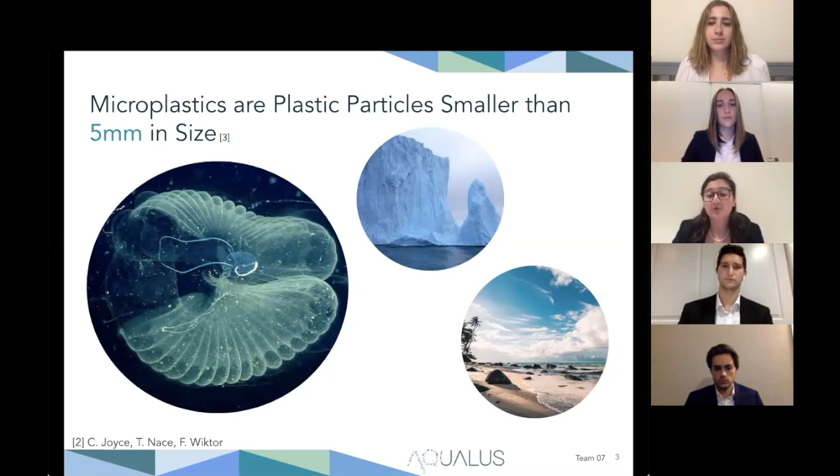Microplastic pollution poses a threat that is potentially far worse than general plastic pollution. Because these particles are so small, they fall within the optimal prey range of many microorganisms. In addition to getting eaten and bioaccumulating up the food chain, varying sizes and densities make them easily distributed across the globe. They have been found everywhere from inside icebergs in Antarctica to on the beaches of remote islands. And because of this small size and vast distribution, they are extremely hard to gather data around.

Research organizations have classified microplastics as contaminants of emerging concern. However, due to the difficulties surrounding data collection in this field, the preliminary research is limited and incomparable across laboratories. This means that the world is not yet in a place to quantify the effects of microplastic distribution on a larger scale. Without this data-driven understanding, there are no grounds to drive policy change and cleanup efforts.

While the interest in quantifying microplastic contamination is relatively new, interest from research agencies across the world means that it will be widely talked about soon. Thus, Aqualus is on the forefront of this novel topic, positioning ourselves to tackle the first steps in this process.

Team Aqualus went out and talked to experts about their current sampling techniques in order to understand what is currently lacking in data collection and what needs to change to gather data on a larger scale. We learned that overall, this data is limited in quantity, low in accuracy, and unrepeatable across labs. And this is due to the tools that they are using to gather samples. Of these tools, there are three main collection methods currently being used.

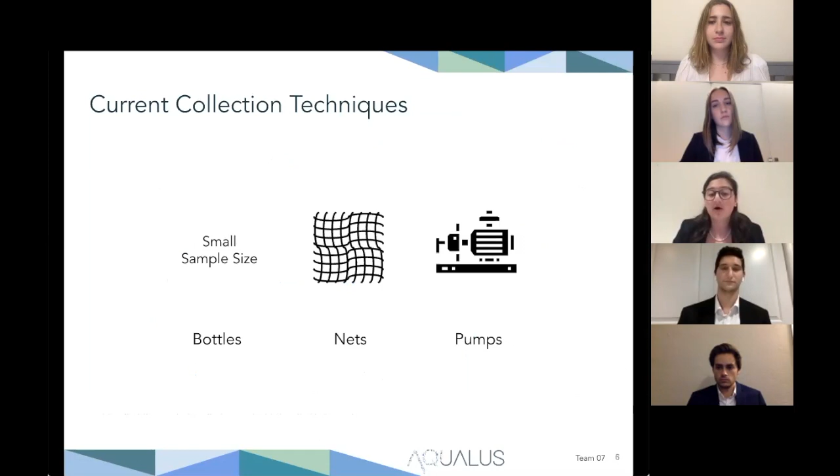The first is using bottles, a simple collection technique where the researcher dips bottles into the water to collect a sample. However, researchers are only able to collect small volumes of the water because it has to be stored on board and transported back to the lab to be filtered. Another technique is attaching a net to a pole and dragging it through the water. But with this system, the depth and volume of collection can only be estimated. Finally, a pump-based system allows researchers to pump water from deeper depths with more accuracy, but since there currently is no existing integration of pumping and filtering, only a small amount of water can be collected.

After reviewing the deficiencies in existing tools and discussing needs from stakeholders, we have determined crucial system characteristics. The system must process 500 liters of water to collect a meaningful sample based on existing data of the minimum concentration of plastic in estuaries and must do this in under 25 minutes due to the number of samples a researcher collects in a trip. For autonomy and user relief, the system must require no more than 2 minutes of hands-on attention per sample in order to reduce the strain on the researcher.

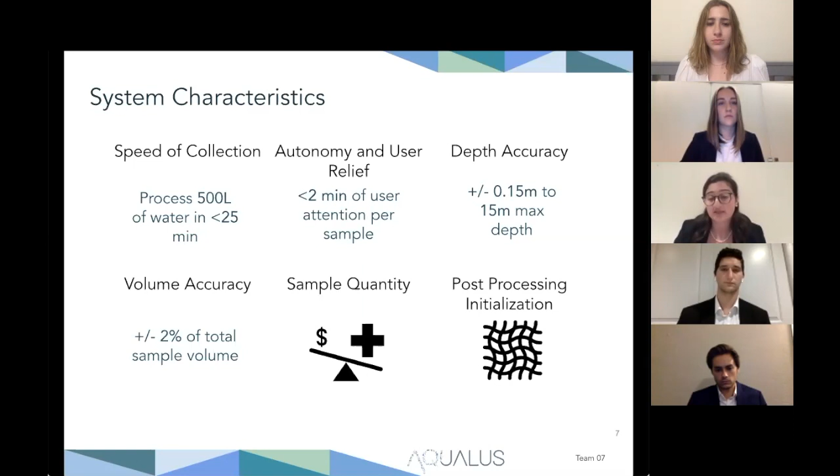To provide value, a system must sample at any depth up to 15 meters, a maximum depth of most rivers and estuaries in this region, and do this within an error of plus or minus 0.15 meters in order to acquire distinguishable data. To get usable data on concentration, a volume accuracy of plus or minus 2% of the total sample volume is necessary. And to provide a sufficient quantity of samples, researchers should be able to take at least 12 samples per 6-hour sampling trip. Finally, it is crucial to the researchers that microplastics are filtered from the water in the field, and plastics of down to at least 50 microns with a reach goal of 10 microns must be collected.

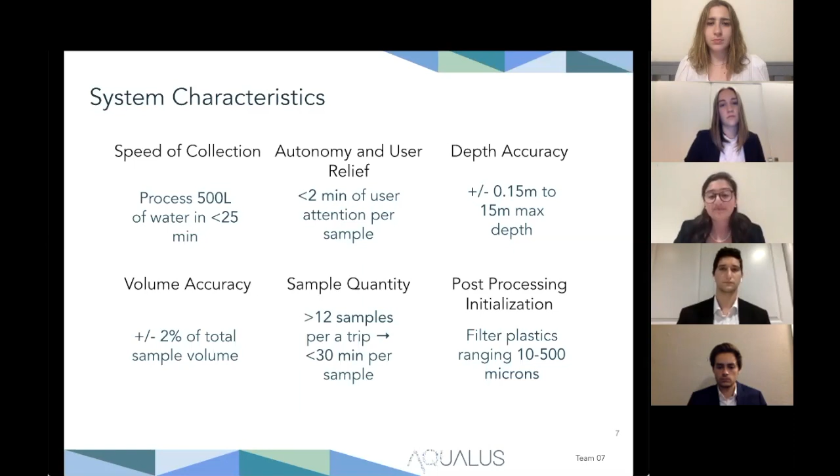To give you an idea of what value these characteristics bring to this research, we are showing you an example of what collected data looks like with the current tools. This graph, representing data from recent literature that used net-based collection, shows the concentration profile along the water column of samples taken from a river. Due to the varying sizes and densities of microplastics, it is helpful to split the data into two categories: particles denser than water and particles less dense than water, to better show the relationship between concentration and depth.

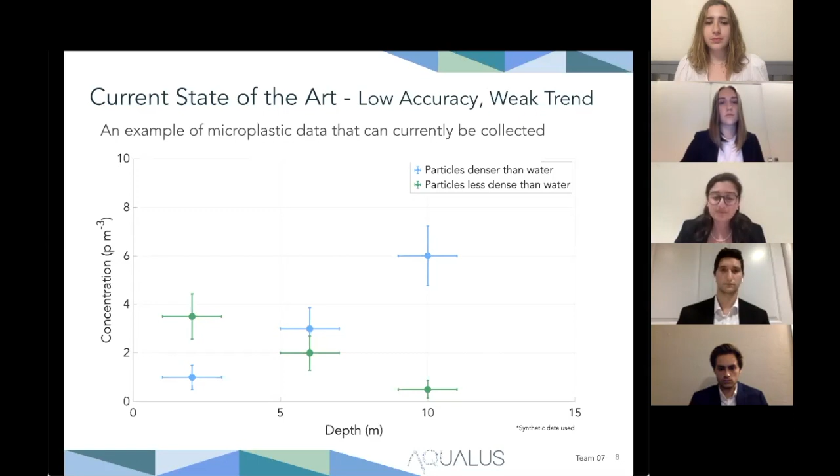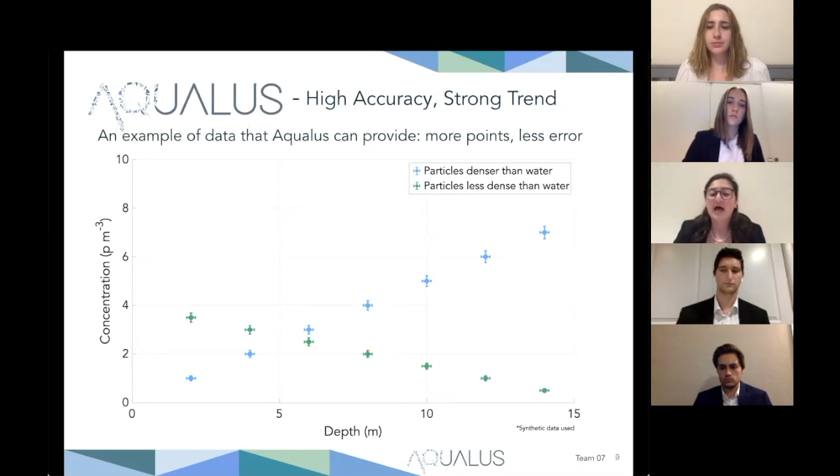However, since these samples are taken far apart and have low accuracy on both depth and concentration, you can only see a general trend and not much more. Here, we show the quantity and accuracy of data that our system should provide researchers. The relationship between concentration and depth is much more detailed and meaningful due to a larger number of data points, as well as much higher accuracies, a crucial feature in actually understanding the distribution of these plastics. This high volume of accurate data will allow for future cleanup efforts and policy change that are not currently achievable.

So we've designed Aqualus to achieve these crucial characteristics. Aqualus can be arranged in various configurations, designed to be operable on nearly any standard research vessel. It contains both autonomous and manual systems to reduce strain on the researcher, but still allow for intervention and control by the expert. Overall, Aqualus collects samples at varying depths and delivers filtered microplastics for later post-processing in the lab.

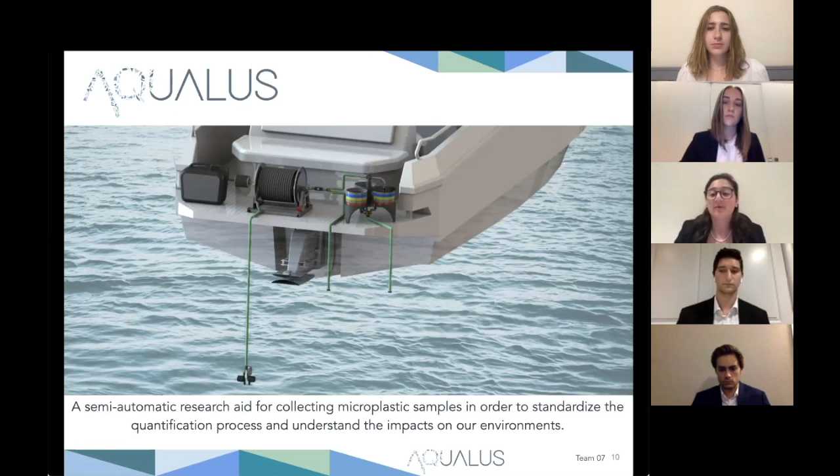Aqualus contains 5 main subsystems. These include submersible sensors and a pump that collect sample depth and volume data from the water source, and a depth control system consisting of a motorized hose reel that moves the hose to the desired sampling depth. The water flows through the hose to the fluid direction system that directs the water into the appropriate sampling stack.

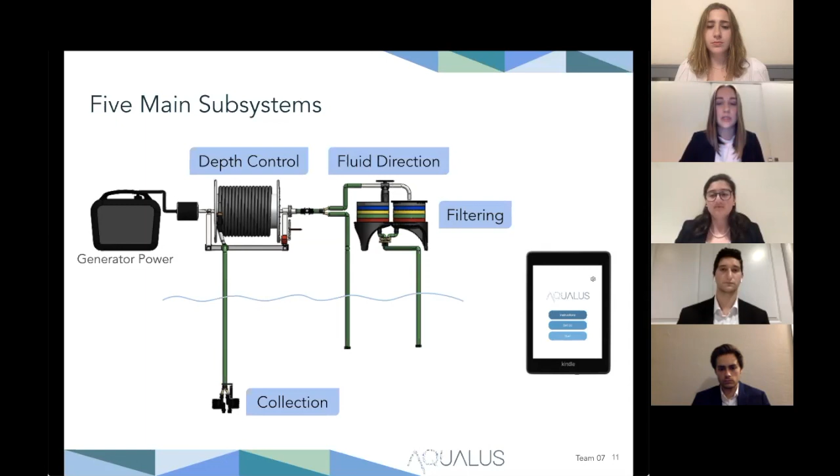Each of these stacks houses filters which filter the plastics between 5 sizes as the water sample flows through them. The water is then discarded back to the water source, capturing only the microplastics to be delivered to the researcher. The user interacts wirelessly with the system through an Android app.

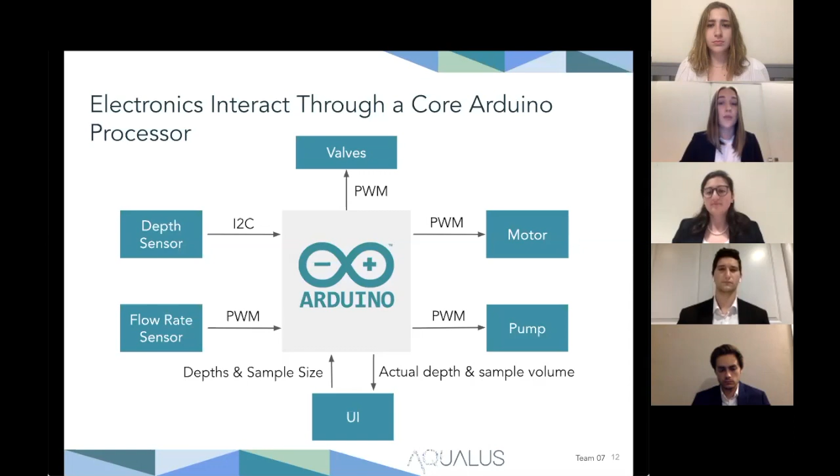Behind this mechanical system lies a communication architecture in which the sensors, pumps, and electronic components interact through a core Arduino processor. This means we take the raw data from the depth and flow rate sensor and use it to inform the commands to the pumps, motors, and valves. This Arduino also wirelessly communicates with the user interface, taking intended sampling parameters from the researcher and communicating back actual collected data.

Subsystem 1 houses submersible pumps that bring water on board through a hose, and an above-water flow rate sensor that is used to control the flow rate of the sampled water. By using a pump, we can rapidly collect a large sample of water from a wide range of depths and easily control and measure the flow of water with a flow rate sensor and control feedback.

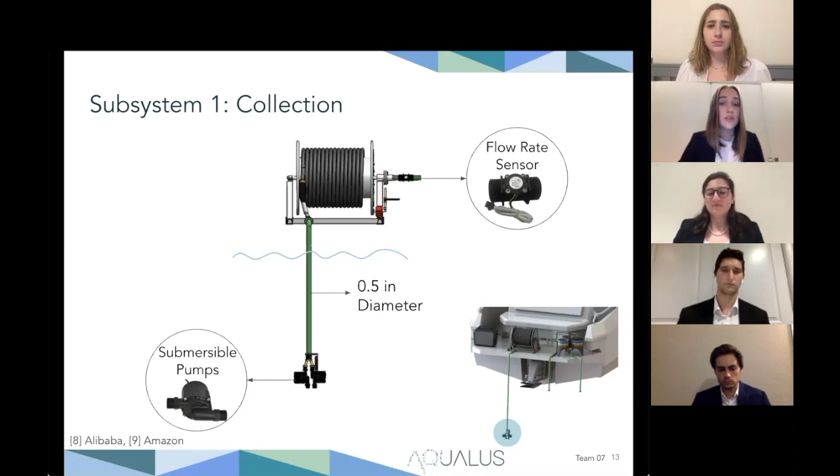The diameter of the hose and all other coupling components is calculated based off of Poiseuille's law that dictates the movement of an incompressible fluid in laminar flow through a pipe of constant diameter, conditions that describe our system well and result in a diameter of 0.5 inches. In order to control this feedback and hold a steady flow rate, something that is necessary for repeatable samples, we designed and tuned a PID controller for the pumps.

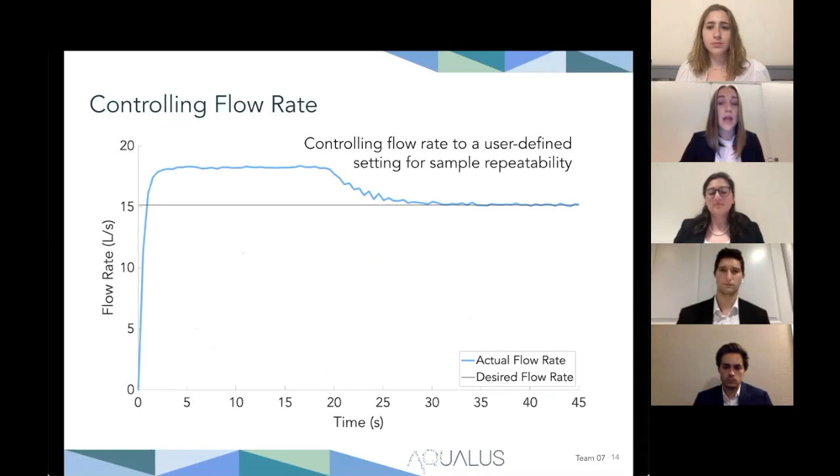This graph shows the reaction of the flow rate in blue, and you can see that after about 30 seconds, which occurs in the cleaning process when exact flow rate is not necessary, the flow rate settles to the desired rate shown by the gray line. This means that we can reliably hit the same flow rate so the same sampling conditions can be replicated for comparison.

Subsystem 2 autonomously controls the depth of the pumps while sampling, a crucial system to take a difficult task away from the researcher and provide a high level of accuracy that is not currently achievable through existing sampling techniques. This compact and reliable hose reel system with mechanical and electronic slip rings extends our hose and wiring up to 15 meters. This consists of a submersible depth sensor that informs a motorized hose reel with depth readings and actuates when the hose is not at the intended depth.

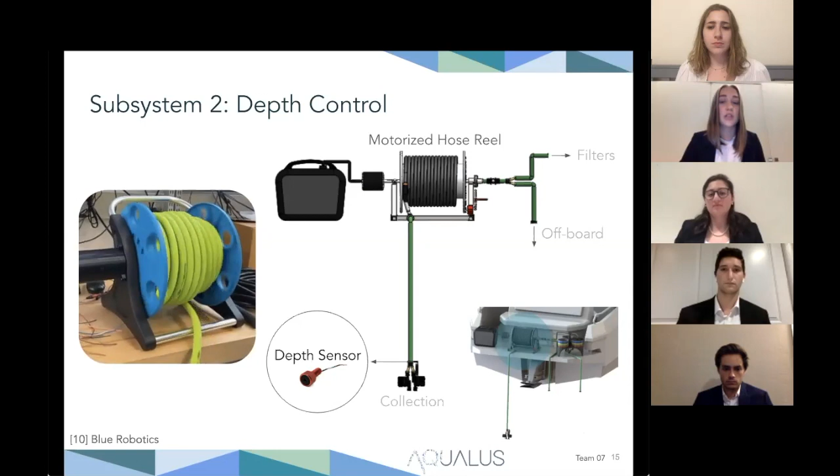The high accuracy sensor eliminates manual error and allows us to automate as much of the system as possible. This controller is active throughout sampling so that it can hold the collection system within the necessary depth range, even in moving water. The water pumped from the depth system and through the hose reel is then sent to our fluid direction system. We've chosen electronic solenoid valves to direct the water either through the filter stacks or directly off-board to clean the system between samples, a necessary step to avoid cross-contamination.

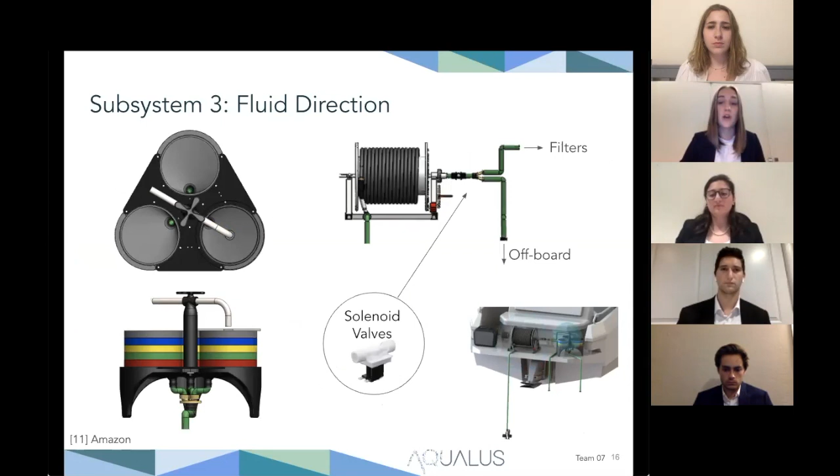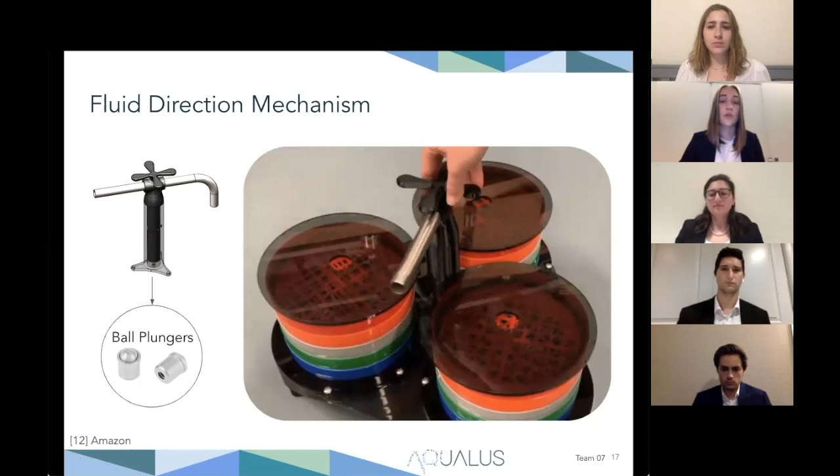A manually rotating faucet head rotates between 3 fixed positions to distribute the water into our filtration stacks. We designed this manual rotation mechanism to be easy to use, incorporating spring-loaded ball plungers that compress with sufficient force. These allowed us to manufacture a rotating head that moves with the force of a hand but snaps into the 3 predefined locations centered over the filters.

Finally, the water enters into our 4th subsystem, which houses our actual deliverable to the researcher, a filter stack composed of color-coded filters that reduce in mesh size from 500 to 10 microns, filtering plastics between 5 sizes that can be taken directly back to the lab for post-processing. The filtering system is one of the most novel components of Aqualus and allows us to capture microplastics of even the smallest sizes, a quality that other collection techniques cannot achieve.

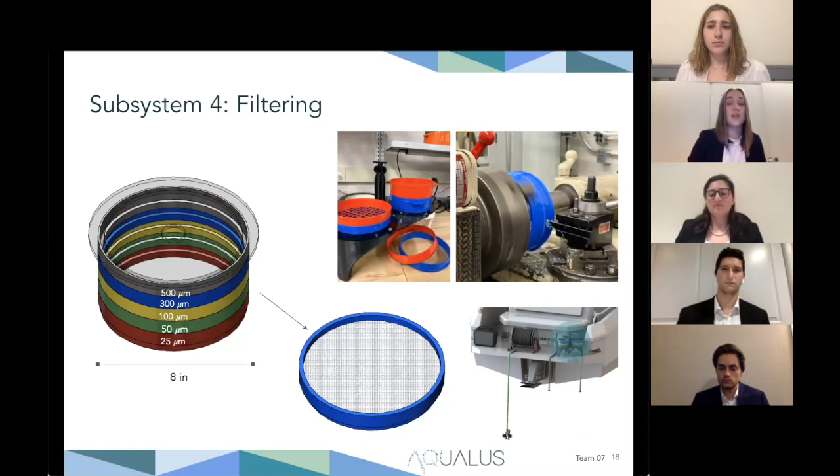Filtering large volumes of water through fine meshes is challenging due to the pressure required to break the surface tension. This is a reason that researchers are not currently able to work with small mesh sizes and proved a significant factor in our design choices. We developed an experimentally based model to ensure the functionality of this crucial feature. As pressure is a limiting factor, we set up an experiment with justification from existing studies to relate pressure and flow rate through the filters Aqualus actually uses.

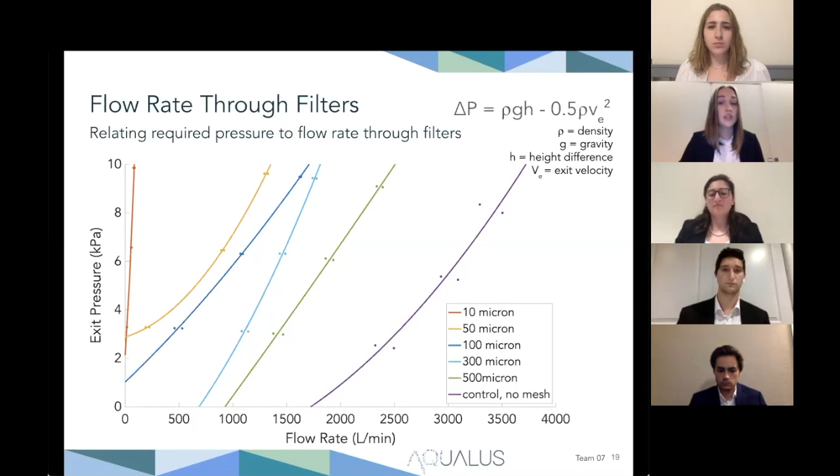The raw data from this experiment can be seen here. Our experiment gave us critical insight into the function of these filters. Although the water could not flow at the necessary 20 liter per minute flow rate through a 10 micron mesh without back pressure, a 50 micron mesh could sustain this high flow rate, and Aqualus still accomplished its baseline goal.

Apart from the physical system, we created the user interface to give the researchers an easy way to communicate with Aqualus. The user simply has to select the depth to sample, the desired flow rate, and the volume, and the app then sends the parameters to Aqualus and commands the sample to start, sending back real-time information to the screen.

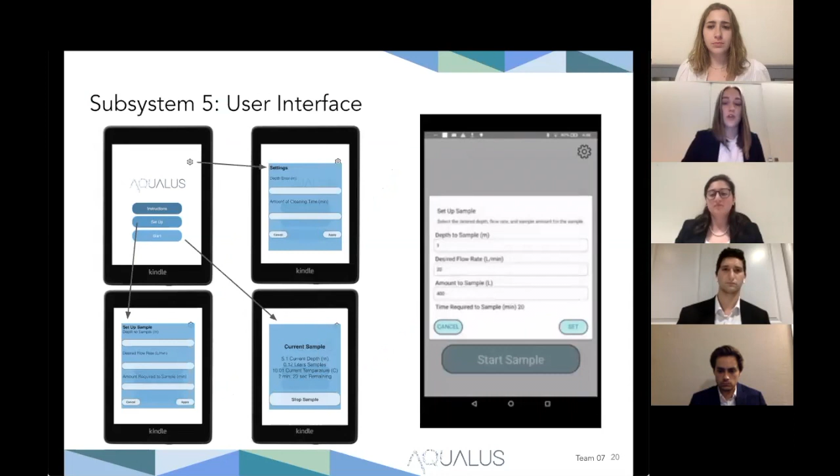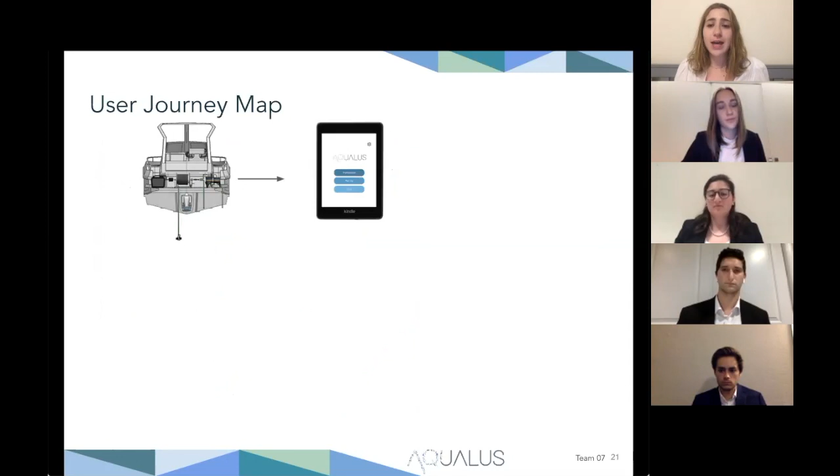Now, let's take you all on a sampling trip. The process begins with the researcher attaching the hose reel and system to the boat. The researcher then inputs the information into the Aqualus app. Then, the researcher puts the filters with desired mesh sizes into the appropriate stacks. Once that is done, the researcher clicks Start in the user interface.

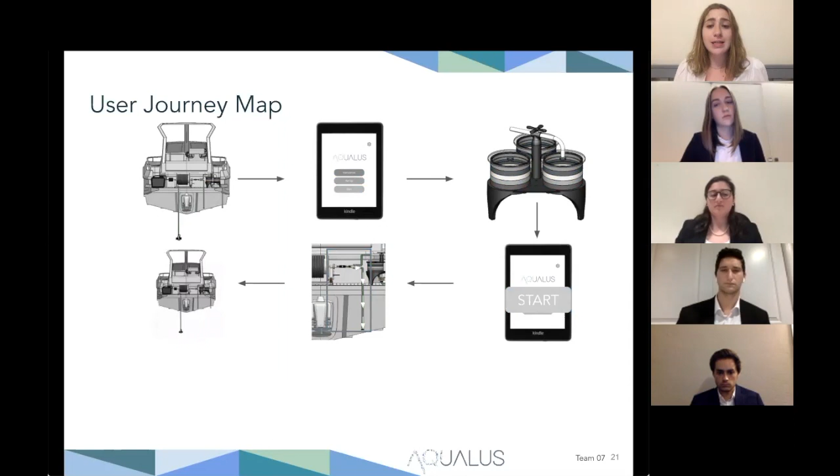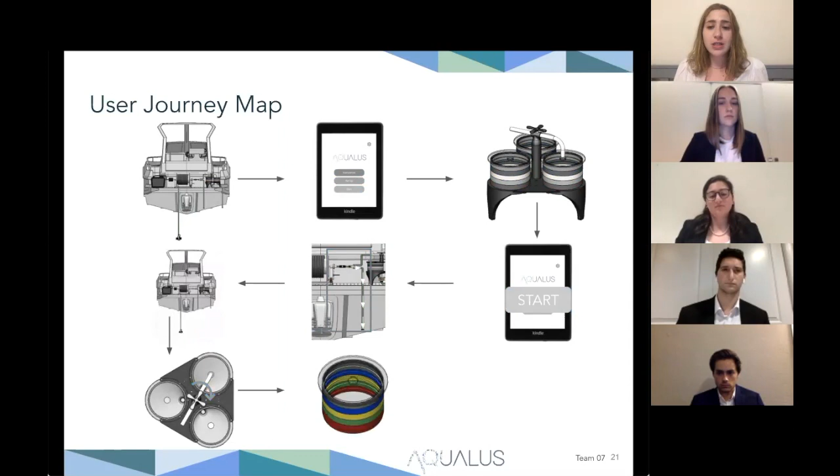Allowing for the researcher to do other work, Aqualus automatically pumps water through the pipes for cleaning. After the cleaning is finished, Aqualus pumps water at the desired depth into the filter stacks. Once one stack is completed, the user rotates the faucet head to the next stack for collection at each depth. The researcher removes the filtration stacks containing the plastics and takes those stacks to the lab for post-processing analysis.

So far, every individual component of Aqualus has been manufactured and tested for functionality. All sensing, computing, and electronic components have been combined with their direct counterparts. Each subsystem has been manufactured and validated and is ready for final integration and full system tests in the future.

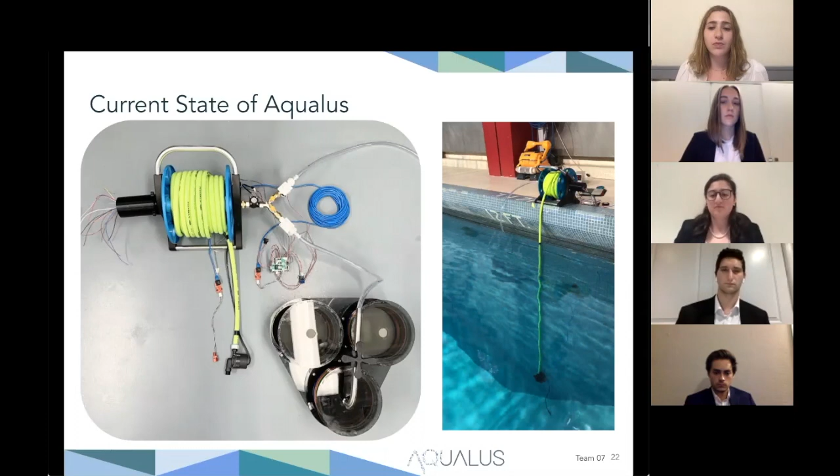Our largest scale tests were performed in the Pottruck pool. The purpose was to validate the motorized components and depth control, as well as pumping water from deep depths at a controlled flow rate. It proved extremely successful and showed that Aqualus could function as designed in a controlled environment. Additional validation procedures with individual subsystems predicted how Aqualus will perform in its final form.

To ensure that Aqualus can actually collect samples, we performed a yield test through our filtration system by running a known quantity of microplastics with known size through the filters and measuring what was collected. This resulted in average yields of 98% with a confidence interval of plus or minus 0.02%. Flow rate tests through our completed filters also resulted in exceeding our minimum rate of 20 liters per minute through any mesh size above 50 microns.

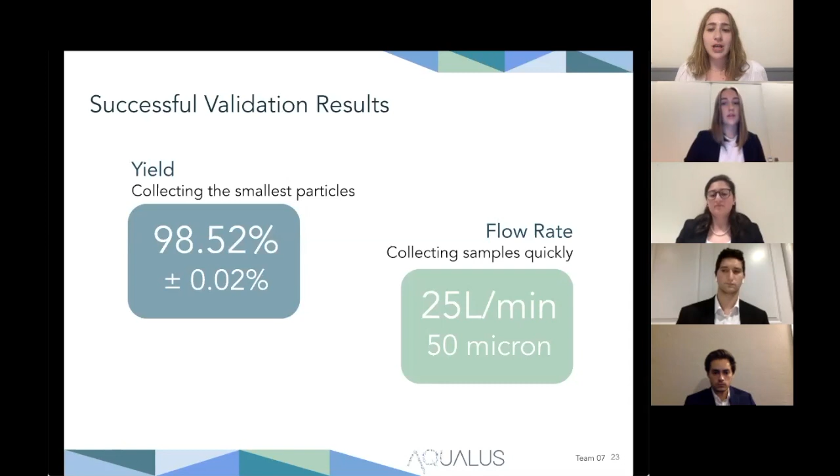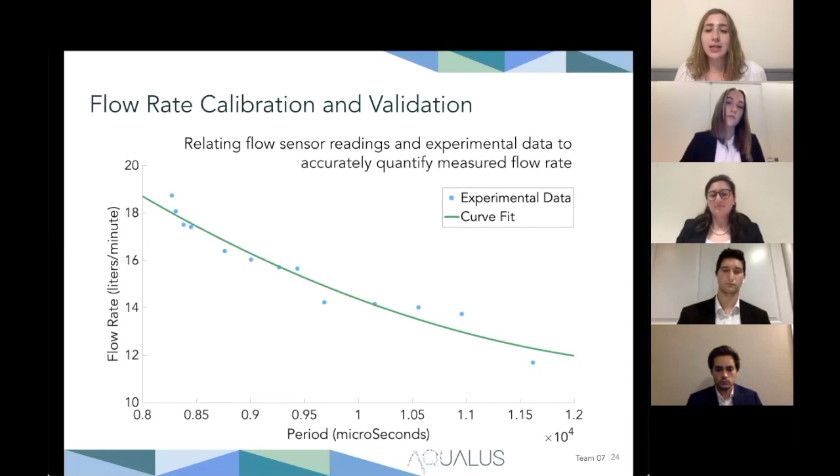We calibrated the flow rate sensor to validate the accuracy and volume measurements, a key system characteristic. This sensor emits a series of pulses to transmit data, but by default only reports values every second. To achieve the required less than 2% error, we needed to relate these pulses to known flow rates every millisecond. Therefore, we developed an experimentally based model shown in this graph to fit a flow rate curve to pulses in real time to accurately know the flow rate at any moment. This was later validated to ensure Aqualus precisely knows the volume of water sampled every millisecond.

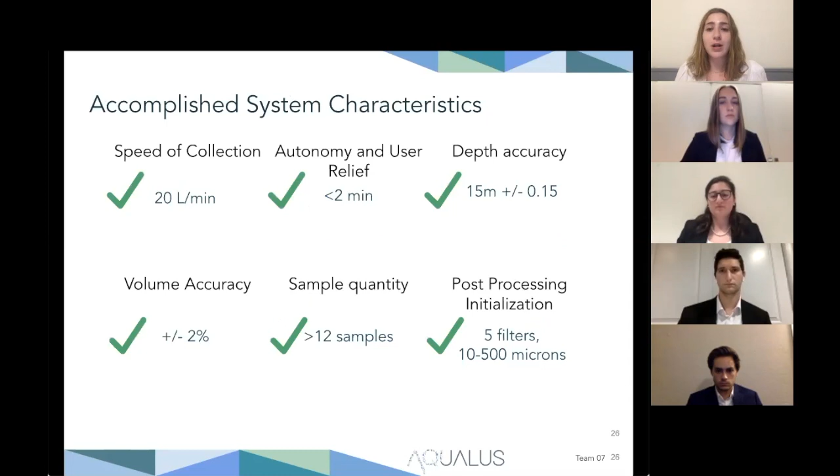The next steps in validation would have been to test Aqualus in real water sources. A Schuylkill River test would have informed us of Aqualus's functionality in external conditions, and a full system test on a boat with active researchers would have helped inform us of quality and user interaction. Both the samples would have been sent to the Philadelphia Water Department to be processed by researchers in the lab and provide us with fully analyzed samples. So, up to this point, we are confident that Aqualus can individually hit every one of our crucial system characteristics and deliver meaningful data to researchers.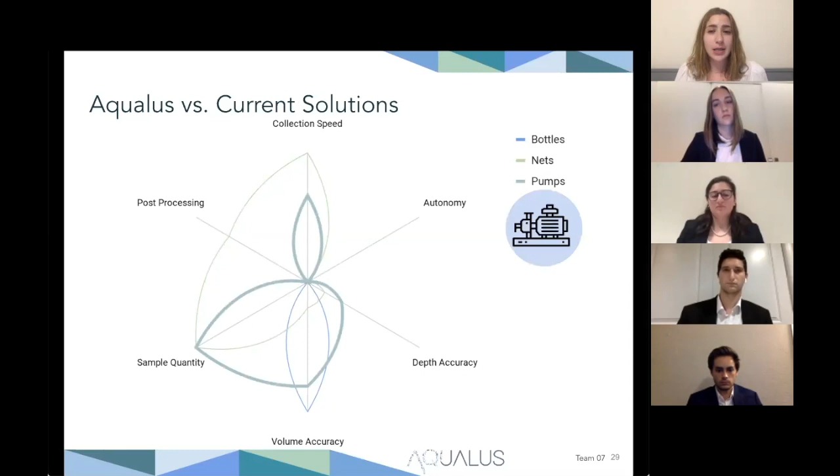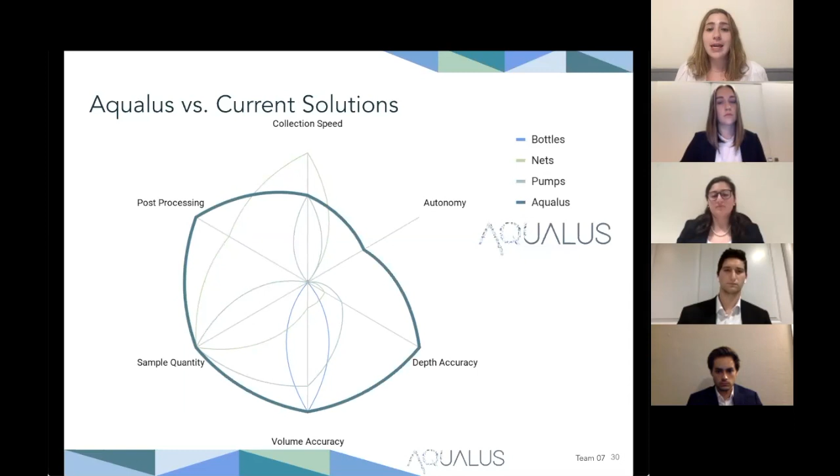Now, with an understanding of Aqualus and the characteristics we have been able to achieve over the year, we can show a quantitative comparison of how our system performs compared to existing solutions. Here, you can see bottles, a sampling technique that, while having high volume accuracy, lacks in every other characteristic. Nets can collect a greater quantity with higher speed and better post-processing, however lack in autonomy and accuracy. Pumps alone have good volume accuracy and sample quantity, but no level of post-processing or autonomy. And finally, you can see Aqualus, which can simultaneously perform well over all characteristics and deliver unparalleled autonomy, taking away the tedious and time-consuming tasks from the researcher.

With Aqualus successfully meeting our system criteria defined by stakeholder needs, we went back to the same researchers to discuss our solution. Our stakeholders overwhelmingly approved our design choices and were extremely pleased with our work. Team Aqualus looks forward to donating our system to researchers to continue to improve into the future.

Microplastics are a huge problem, but we do not know the full effects they are causing to humans and the environment. Aqualus is on the forefront of this under-researched field, providing a way for researchers to accurately and repeatedly gather data, and giving scientists a new understanding of the lasting effects microplastics will have on the Earth. The environment is the pressing issue of our generation, and Aqualus is a solution taking steps towards controlling and regulating plastic pollution.